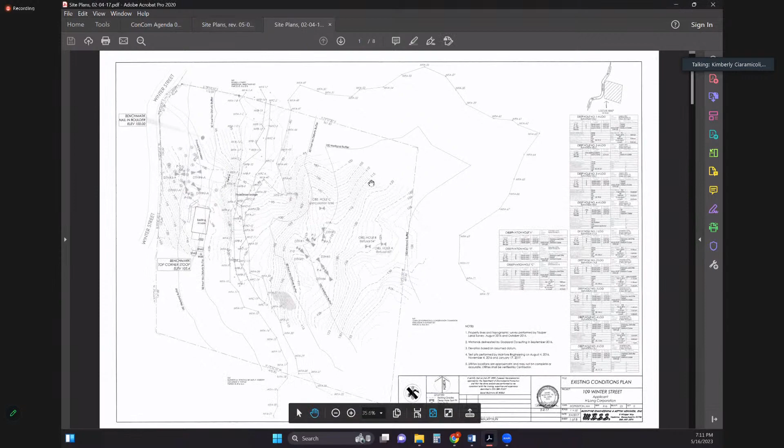Okay, here we go. So this was a project that the commission originally approved in 2017. There's an existing single-family home at 109 Winter Street. Here's the driveway. The permit is for construction of a driveway and a single-family home kind of in the back of the parcel. The driveway involves a crossing of a wetland and intermittent stream system. As I mentioned, the commission approved it in 2017, and I believe there's already been one extension for 3 years. Tonight, the applicant is requesting another 3-year extension of this permit.

I do note that recently the commission also permitted replacing the septic system for the existing home in the front of the property. Anna and I were able to take a look out there just to make sure the permitting associated with the septic system looked okay and the site was stabilized. And we did find that the site is largely stabilized following the septic system replacement, which is right in this location.

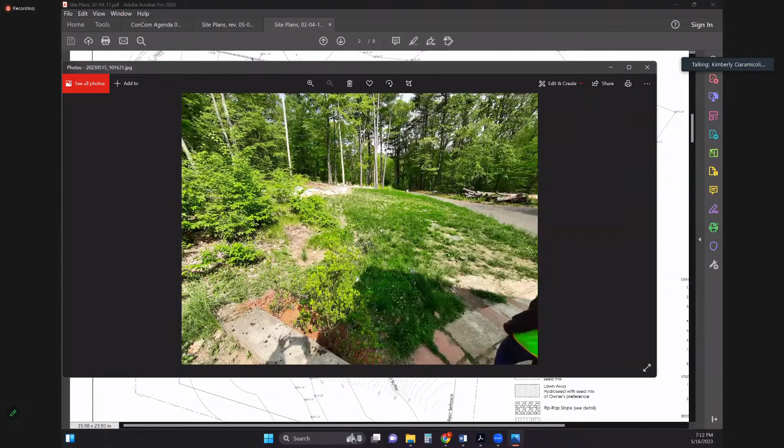Okay. So I guess the question here, Kim, is in your professional opinion, is the 3-year extension appropriate? Should we limit it to 2 years? What are your thoughts there?

Yeah, my thoughts are that 2017 was a ways ago. Generally speaking, wetland delineations are valid for about 3 years, so this is definitely surpassing that amount of time. It may be somewhat in the commission's interest to limit the extension so that if some things do change, they would have the chance to re-review this project.

So is a 2-year extension appropriate in this situation? I would say it's the purview of the commission. How confident do you feel? Do you feel like you would like a chance to re-review this, or do you feel comfortable extending it?

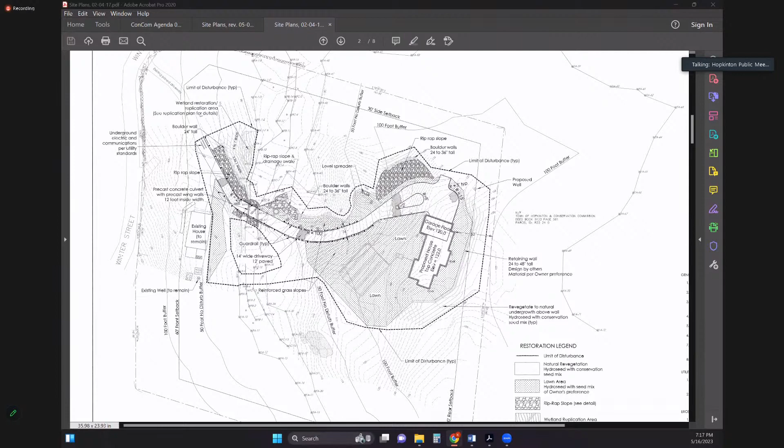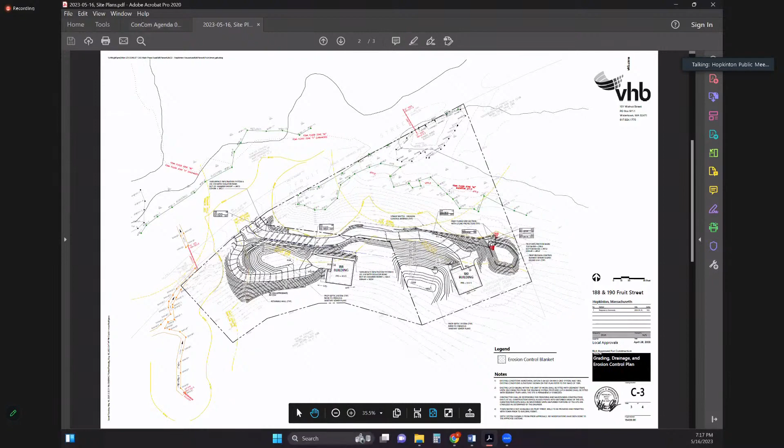All right, 7:17, so let's move on to the new hearings, Rebel Hill LLC. The Hopkinton Conservation Commission will hold a public hearing on Tuesday, May 16th, 2023 at 7 o'clock, virtually online, to hear all persons interested. Notice of intent filed by Rebel Hill LLC to construct 2 single-family houses with associated drainage and site work. The location is 188 Fruit Street, Assessors map R2, Block 21, Lot B, and 190 Fruit Street, Assessors map R2, Block 21, Lot A.

We have the applicant or a representative on the call. Hi, good evening everyone, my name is Richard Valarelli. I represent the owner or owners of these lots, and along with me tonight is Nick and Bridget from VHB to help walk us through some of the wetland and stormwater management aspects of the plan.

These lots were broken off from the golf course some time ago into their own single family lots, and the owners wish to develop these lots into single family homes. Over the past year, we've been busy reflagging and delineating wetlands to understand what's actually out there. Internally, we've been through several renditions, and this is the one we submitted with our notice of intent, which we feel is the least impactful way to develop these lots and stays completely out of a 50-foot buffer.

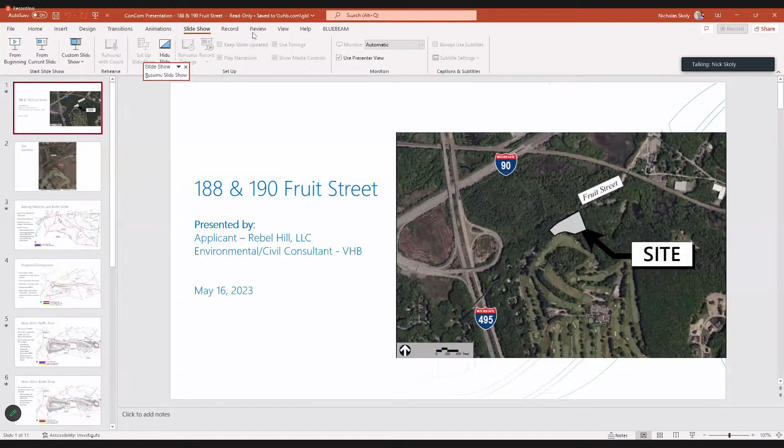As Rick mentioned, we were brought on recently to assist with the project. We understand this went through the ORAD process a couple of years ago, and there were some questions - I know a concept was shared. We've looked through a number of different options to try to ease some of the concerns the commission mentioned during that process. I'll kick it over to Bridget to talk about the wetlands themselves, then I'll pop back on to talk about the site and stormwater.

Thanks, Nick. I'm Bridget Hilgendorff, VHB, the environmental and civil consultant for this project for the applicant Rebel Hill. We're here to discuss the work at 188 and 190 Fruit Street. The project is located on these two adjacent parcels south of Fruit Street and north of that golf course and country club that was mentioned.

Looking at the wetlands, the site contains bordering vegetated wetlands on the northeast corner, in addition to a wetland located north of Fruit Street across the street. There's also an intermittent stream on the western side of the site, and in the northeast corner is bordering land subject to flooding. In terms of the buffer zone to these resource areas, it consists of undeveloped forest. You can see the 100-foot buffer zone to BVW and Bank in the bold dashed red line, and the 125-foot vernal pool buffer in the solid blue line.

There is a portion of the buffer zone that's previously disturbed, shown in the green bubble in the bottom corner of the site. This was previously used by the adjacent golf course for staging purposes, to stage construction debris.

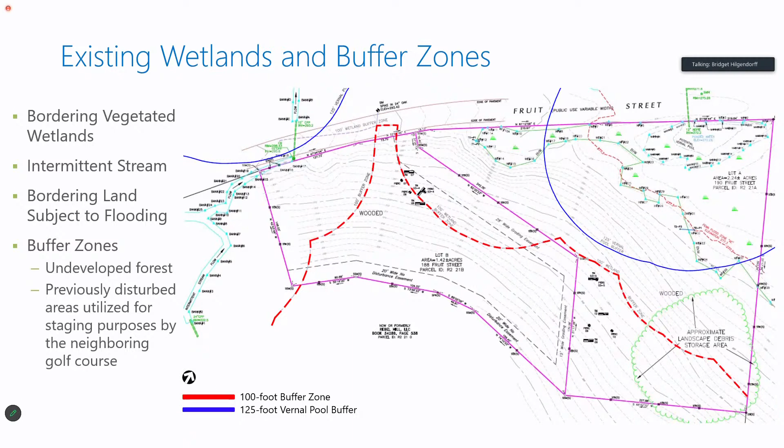Next slide, please. The development proposes to construct 2 single-family homes, one on each of these parcels, in addition to the 2 associated driveways, perimeter retaining walls, and stormwater BMPs. Work is only proposed within the buffer zone - no work is proposed within resource areas. Here you can also see the 50-foot no disturb zone highlighted in yellow.

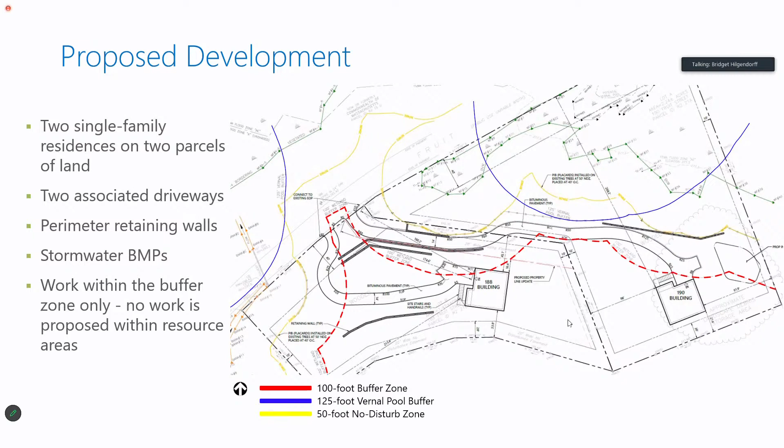Next slide. Looking at the work itself, there will be no impact to BVW, and no work is proposed within the 125-foot vernal pool buffer. Work within the 100-foot buffer zone includes the construction of the driveway and retaining walls, grading and landscaping activities, stormwater BMPs, and a small portion of the house at 188 Fruit Street.

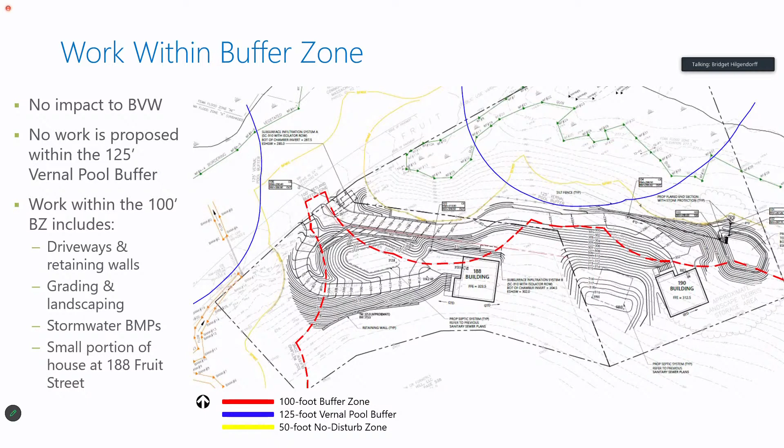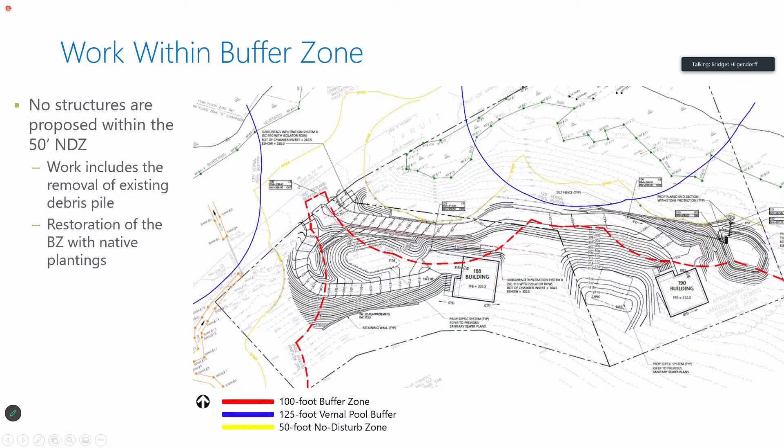Next slide. Looking at the 50-foot no disturb zone, the only work here includes removal of the existing debris pile and restoring this area of the buffer zone with native vegetation. If we go to the next slide, you can see the landscaping plan - this area of the buffer zone will be replanted with native shrubs and trees to provide viable habitat and allow this area to succeed back to a forested area.

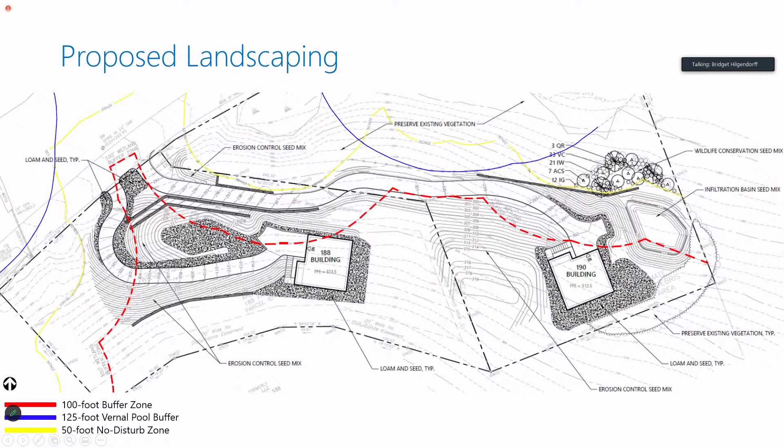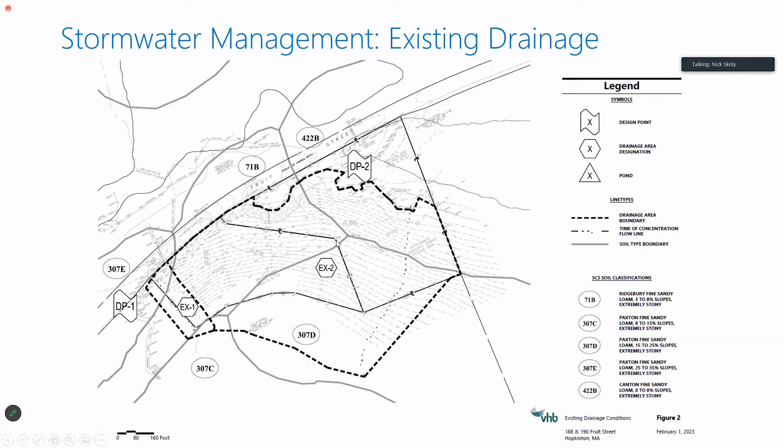Thanks, Bridget. As Bridget mentioned, the site is currently mostly undeveloped. From a stormwater standpoint, there are 2 design points: the wetland to the south and the wetland to the north. Design point 1, to the south, only a small portion of the site drains there, and that'll continue to remain undeveloped in the future. The big analysis we ran from a stormwater perspective was for design point 2, which is also that vernal pool.

As you can see, design point 1, which we discussed, stays exactly the same, and then design point 2 picks up the remaining drainage area. So 188 Fruit Street, which is the house on the left of this page.

The house itself will drain to a subsurface infiltration system to provide water quality and mitigate those peak rates. The 190 Fruit Street lot driveway will also drain to a subsurface infiltration system. And the house and a portion of the driveway will drain, on the right-hand side of this screen, to a surface basin, which will also provide infiltration for water quality and mitigation of peak rates.

So in looking at this design point, we do actually decrease peak rates for the 2, 10, 25, and the 100-year storm.

I've been working with Kim, going back and forth on this — we're exempt from the state stormwater standards, but we are required to meet the local stormwater standards. Since there was some confusion early on, we are meeting both: all the state standards as well as the local standards.

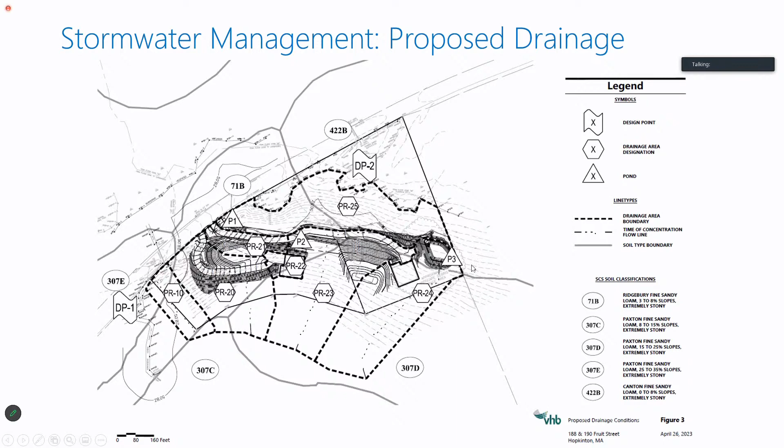This is a more zoomed-in version, which shows in dashed lines the subsurface systems — one is at the end of the driveway and just adjacent to the 188 building — and then the surface basin as well. The surface basin is being located primarily in the area where the landscape debris was, so that portion will be cleaned up.

The previous consultant did do a number of test pits out here, one for the septic systems as well as for these infiltration areas. I believe they were in front of you requesting permission to do that, when they showed that concept about a year or so ago.

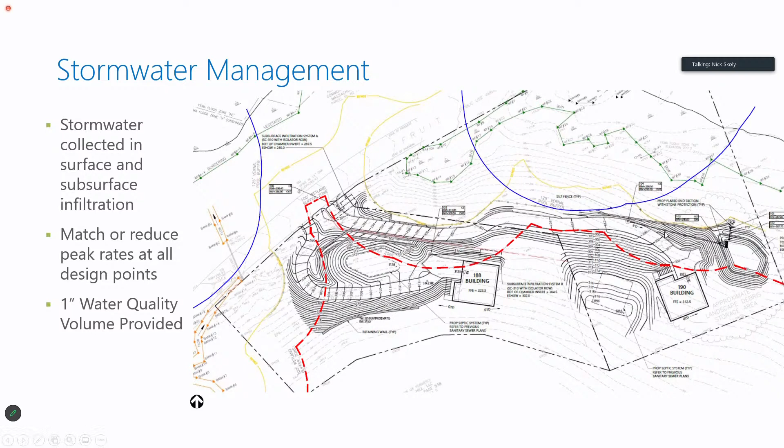We did get a few comments from Lucas. I can actually share an updated version of the plans — we got them the other day and have been working through them. Sorry for the late submission, but we just submitted a response to those comments. There were a number of comments, but I just want to walk through the few I think are important.

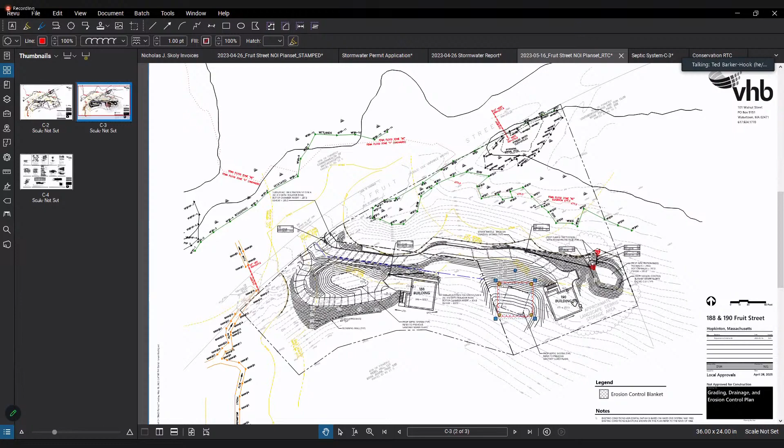If I may continue—if I'm reading the plans correctly, next to the 190 building, there's a tremendous amount of reshaping of the earth. I'm looking at the contour lines in light gray and then redone contour lines in black. Is that true? Is that what I see? I'm looking at the other side of the house, Kim, or whoever's working—yeah, this one.

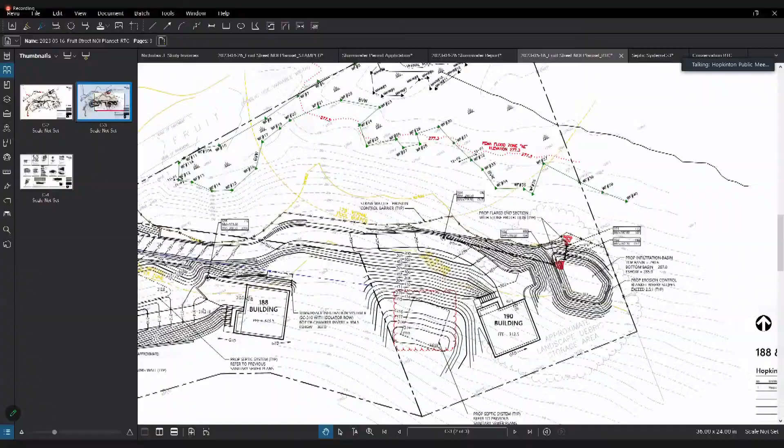Nick, I think you've heard from the commission. I think there's a little bit more work that needs to be done on this. Bridget, thank you for your presentation. And we'll continue this out to the next hearing, which is June 6th.

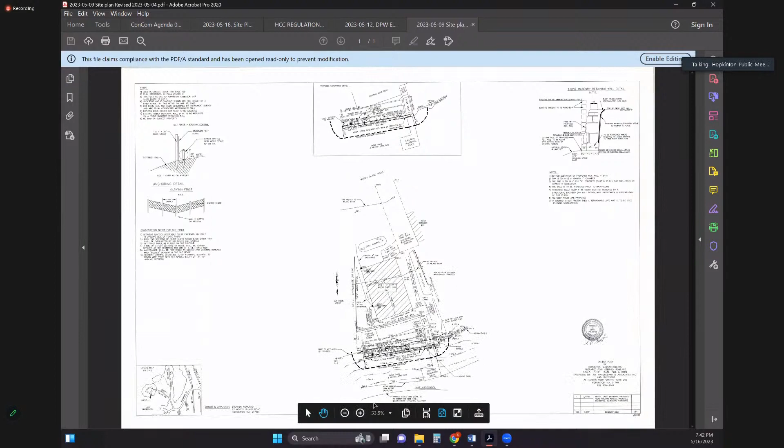Okay, thank you, thank folks. Thank you, appreciate the comments. Look forward to sort of working this through with you guys. Thank you. Thank you.

Okay, moving on to continued hearings. Roland, 27 Woody Island Road, notice of intent to replace the retaining wall.

Do we have the applicant on the call? Hey, this is Dave Oppenheim. Mr. Lockhart, good evening. I have Steve Rowland here with me as well, owner and applicant. So we were back in front of the board on March 14th.

We've made some adjustments on the notice of intent for the information that was lacking. I believe we're all set with the notice. We updated the plan with some additional site features. We indicated the existing driveway to the north from Woody Island Road that's going to serve as our access point. We've indicated some plantings, some spot elevations, some contours, some walkways, some planters, some grass.

One of the comments some of the board members had was to indicate the downspouts. If we could disconnect the downspouts and put flexible tubing and piping, and move it and change the direction from heading to the lake to the front yard, which we've done. There was a retaining wall behind the house underneath the deck that's been added as an existing site condition.

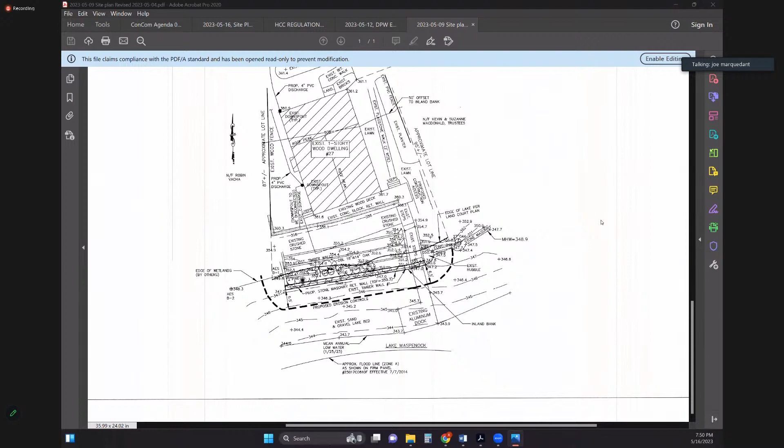Appears to be a 3/4 inch crushed stone, so to use a typical jute with an opening, some of that stone's probably going to go right through. A lot of that material is stone, there really isn't much earthwork. So we're going to use a coconut fiber and 70% straw, kind of like a blanket that's biodegradable with no weeds. We're going to lay that in, and it will just disintegrate over time. Got it, okay. Yeah, you can see the grade, that stone that's there. Thank you. Yeah.

Okay, questions? Yep, sorry, go ahead, Joe. Dave, so we will provide for the variance, we'll do that. And yes, like I said, we are going to file with Chapter 91.

Okay, great. Thank you. Questions or comments from commission members? To the chair, Kim. I would just recommend a special condition on any order that we issue to have our order be null and void should the applicant not obtain the Chapter 91 license as required.

Okay, or maybe we already have a special condition that says all the other approvals need to be in hand. Maybe we're already covered, because the Chapter 91 needs to be in hand, right, as a condition of our permit, or sorry, our order, right Kim? Just thinking out loud. Okay. Sorry, Jim, did you have a comment?

No, why is my hand raised? No, okay, I thought... all right.

Any other comments, questions from commission members? Questions or comments from the audience? Okay, Kim, are we comfortable voting on this tonight?

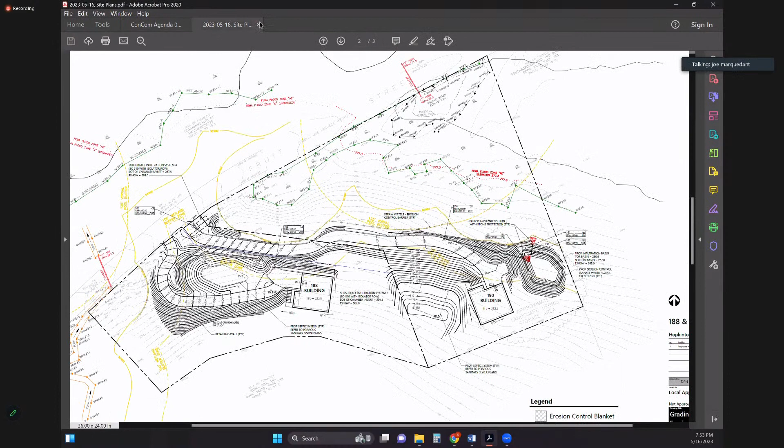Okay, great. Thank you, Dave. Thank you very much. Have a good evening. You too. Bye-bye.

Okay, moving along, RDA for McEachern, 55 North Mill Street. This is a request for determination of applicability for an in-ground pool.

Good evening. Good evening. My name's Norman Hill from Land Planning. My address is 52 Millbury Street in Grafton, representing the McEacherns this evening.

We discussed this at the last meeting, and there were some changes you asked me to make to this plan. One change was to add a leach pit for backwashing or draining the pool. We've added that. You also asked us to add siltation controls around the temporary stockpile area, and we've noted that those need to be put in place. Then you asked for a 10-foot wide swath of land to be allowed to grow back in naturally. That's the gray area on the plan, currently lawn. My clients have agreed to stop mowing that area and to put signs every 30 feet to mark the protected zone, so it can grow back in.

I'd like to also point out that this is a proposal for a new swimming pool, which will be built in an area that's currently all lawn, so we're not proposing to take down any trees. I'll be happy to answer any questions you may have.

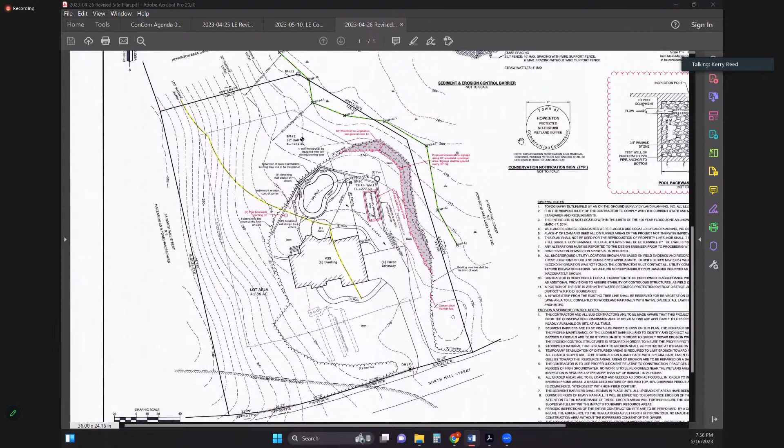Thank you all very much. Everyone stay well, thank you. Thank you, Mr. Hill.

All right, moving along, Hopkinton Parks and Rec, 4 Lakeshore Drive. This is a notice of intent for a seasonal dock. I think, Kim, all we were waiting on with this application was the DEP file number, correct? You are correct.

All right, are there any questions or comments from commission members? To the chair, we still don't have the DEP file number. I think we need to continue this. All right, thanks Kim, so we'll continue that out. Were there any questions or comments from the audience while we're on this application? Okay.

Singh, 42 Greenwood Road. This is a continuation of a notice of intent for the tennis court. Kim, you want to give us an update? Sure, just give me a second to pull this up.

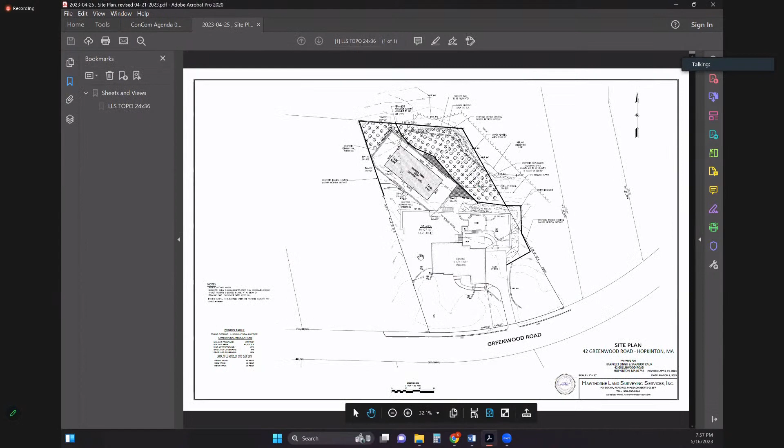So this is an application, like you said Jeff, for the construction of a tennis court in the rear of a single-family home. At the last meeting, the applicant provided updated plans the day of the meeting, and the commission requested that Lucas Environmental be allowed some time to review the updated plans and provide a comment, which Lucas Environmental has done. The applicant has actually already responded to the comment as well. So I wonder if it would be most efficient to have Joe run through his comments briefly and then have the applicant respond to get us up to the current progress.

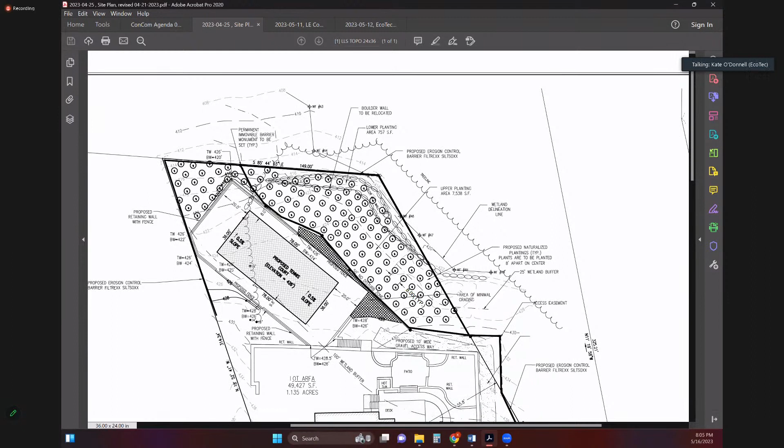So, Kate, is the location of the toe drain actually depicted on the plan? It's not currently. So it's in the northwest part of the wall? Yeah, northwest part of the wall. Okay, that's the low point if you look at the current grade. Yep, so in that kind of triangular area there, it would be. Okay.

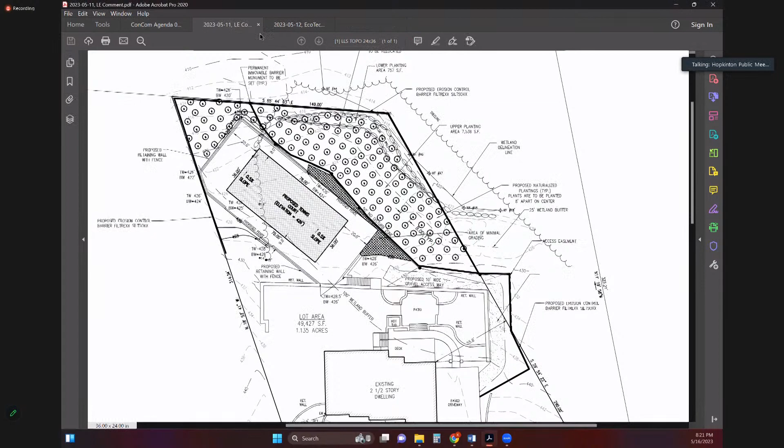All right, Kate, thank you. Thank you, have a good evening. Thank you, Mrs. Singh, and good luck with the tennis, young lady. Thank you, I wish you well. Thank you very much. Thank you. Okay.

Hughes, 47 Stony Brook Road, request for a 1-year extension permit.

Kim, you want to give us a little bit of background on this, please? Sure, let me see if I can find a good plan for us to look at.

So 47 Stony Brook Road. There's generally a wetland complex here, I believe to the south. It was originally permitted as 2 single-family homes with a common drive. Since the time of permitting, the application has changed to 1 single-family home with a single driveway on the same lot, so this is the same parcel kind of turned. The wetland complex is over here.

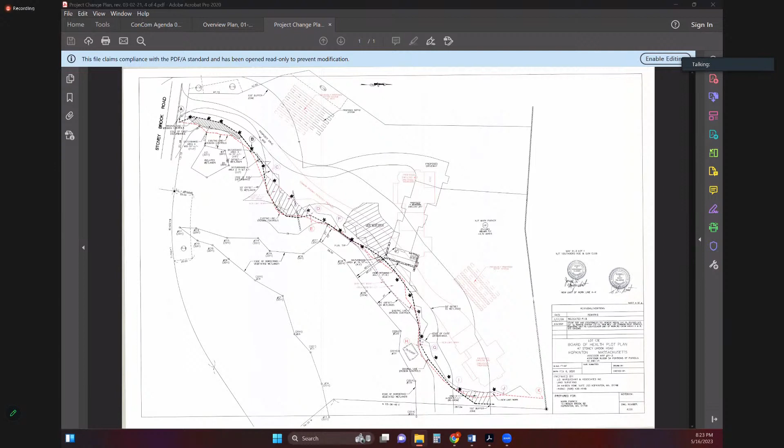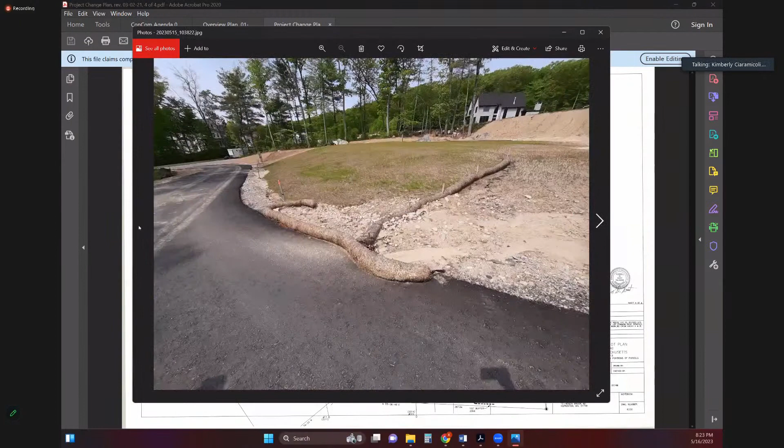All right, so the house is constructed, the driveway's in, the septic is in. For all intents and purposes, this application is almost all the way there. Here's the house, here's the septic with a little bit of vegetation.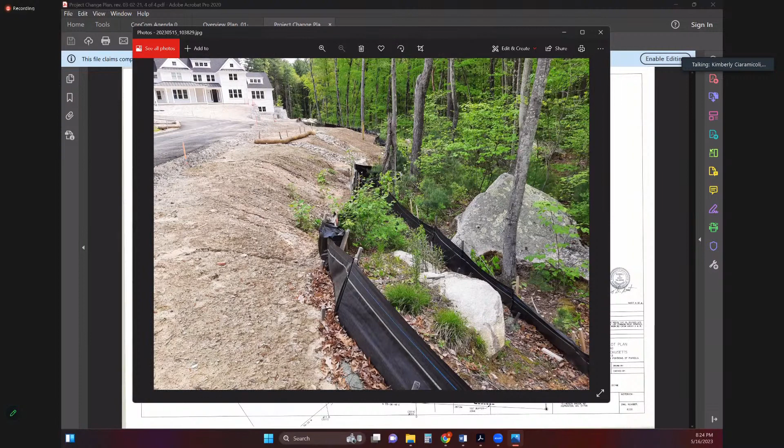When I went out, I did notice that a lot of the area is unvegetated, with kind of loose soils, and there was evidence of real erosion occurring in various spots. You can see here, there's erosion controls, and somebody dumped some riprap to try to control it down towards the slope. It does look like there's efforts to install erosion controls and good practices for erosion and sedimentation. So the contractor has been doing a good job, but the condition out there is just a lot of unsecured dirt.

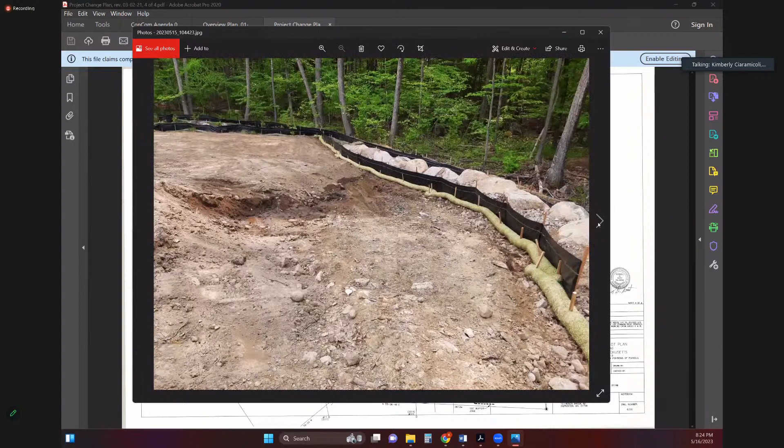So I did reach out to the homeowner about my concerns. She provided an update that their landscapers intended to spread loam and do final seeding in late June. I reached out to her and let her know that timetable should be moved up into May, not only for erosion and sedimentation control, but also because the seeding will take much better in May versus late June. You can see there some of the old erosion controls getting overwhelmed.

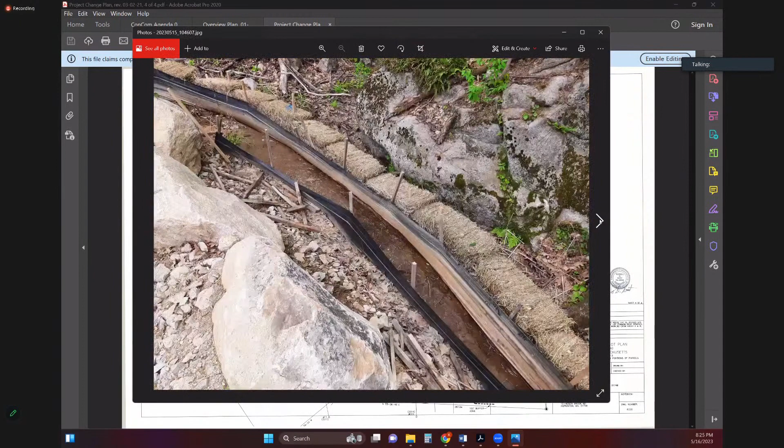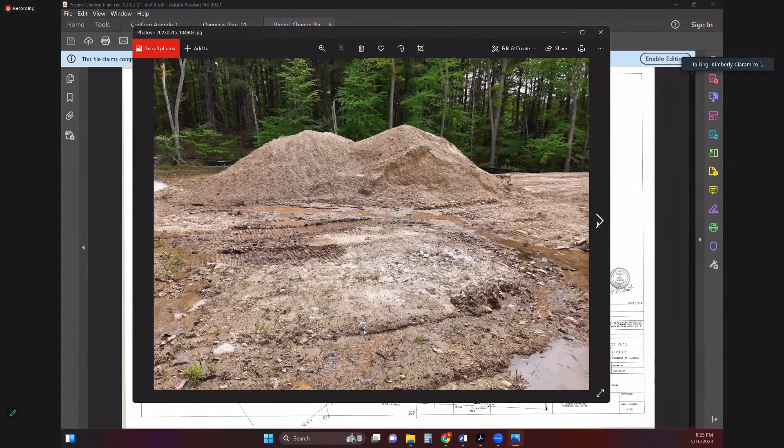And there are two areas on the site, which was interesting, where groundwater breaks out of the slope, one there and one there. The groundwater is currently flowing over an area that's unsecured and carrying sediment, so that will need to be dealt with. There's a stockpile here. The homeowner is receptive to moving the plan up for final stabilization, and I believe the site contractor is going to help the landscaper out to get some site stabilization going as soon as possible. Jamie, the homeowner, has been waiting patiently on the line.

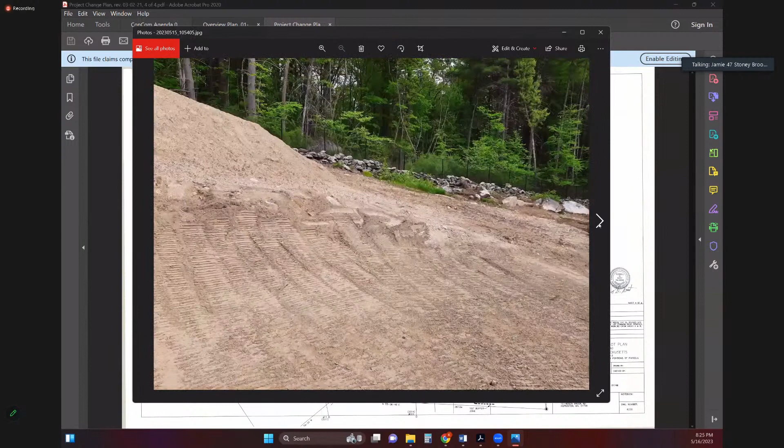Jamie, do you want to jump in and add anything here? Yes, our goal is to try to get this done as soon as possible. We're close to the end of May, so end of May, early June, because we agree with you, Kim — if we do it late June, there's a possibility it may not take. And the last thing we want to do after this extremely challenging project is waste any money. So that is our goal.

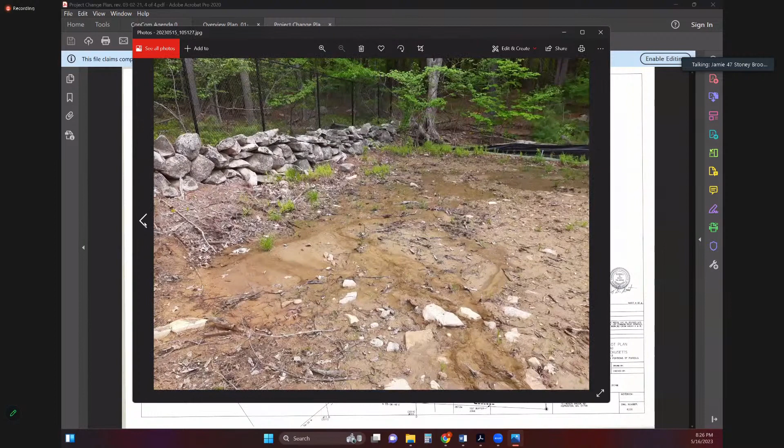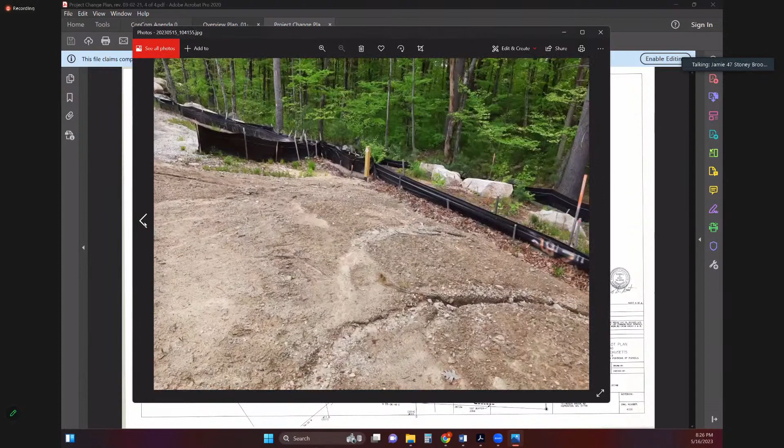And we have the excavator out there now prepping it so we can get the loam in ASAP. So our goal is to do everything you ask as quickly as possible. It's just been such a challenging project for us and really overwhelming, so everything has been pushed back and been a little difficult. That's where we are right now. But we are absolutely trying, and we have an amazing builder who has been keeping up with the erosion control, and he has people out there all the time. He would come out every rainstorm to make sure nothing was breached or anything like that. So we're doing our absolute best. I can assure you that.

So Jamie, are you the homeowner? Yes, my husband and I. Okay, and who's the contractor, if you don't mind me asking? Brenshaw Corp, it's Dave Wilkinson from Brenshaw Corp.

Yeah, okay, no, we appreciate you. I know it's frustrating, it's been a challenging project for you guys. We appreciate the efforts on the erosion controls you guys have done, and the contractor has done a great job making sure the site is stabilized and nothing's getting into the resource areas. Having said that, we just need to get this kind of buttoned up, as you say. So I think the 1-year extension request is appropriate, Kim.

Yeah, I would agree. If you're amenable, I'd like to carry this on the agenda for one more time and see where we're at at our June meeting. As we said, the contractor appears to be doing a good job with the erosion controls, but given the volume of unsecured soils, if we did have a really big storm, it makes me a little nervous.

So I just want to keep this in our view to make sure it gets prioritized, Jamie. Does that make sense to you, if we can just continue this? I'm sorry, I haven't been on a call like this before. Does that just mean you wait for an update and then wait to extend it?

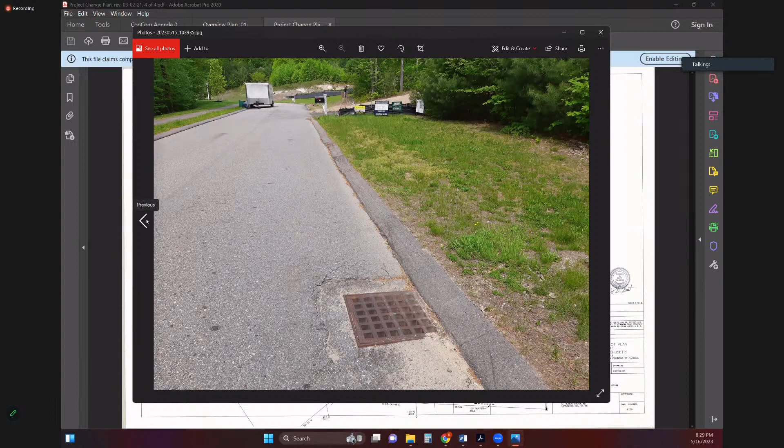Okay, thank you, sorry to slow things down, Jeff. Yeah, no problem, thank you, Ted. Okay, so Jamie, we'll just continue this to the next meeting, and if the contractor goes forward with the stabilization, we should be good to go. Okay, great, thank you. Through the chair, okay, thank you.

Yep, Kim, sorry, just one more thing for Jamie's benefit. Hydro seed with tackifier would be my recommendation. It'll get it nice and sticky with a good layer of seed on there, and it should hold the loam down and get you a good base for growth. Okay, well, thank you for that.

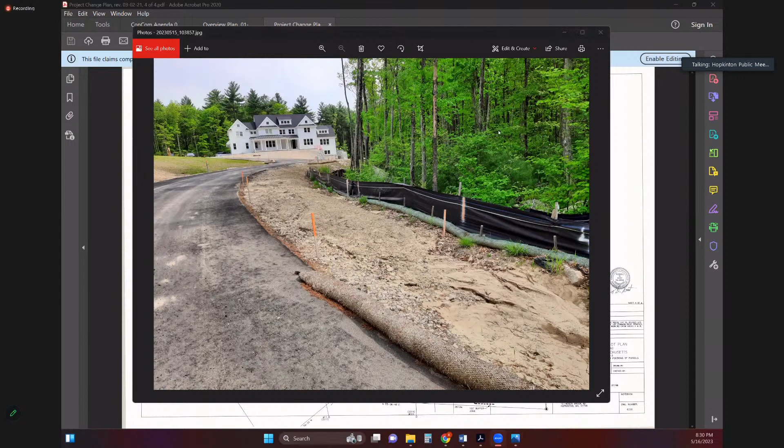Thank you, Jamie, thank you so much. Welcome to town. Yep, thank you. Bye. All right, so Kim, what was that you recommended?

Just a hydro seed with a tackifier, it's like a bonding agent. Oh, a tackifier, okay. Okay, good to know.

All right, Wall Street development violation discussion.

Kim, I don't think Mr. Petrosi is on the call. Do you want to give us an update? I know Ted went out to the site a couple weeks ago and the erosion controls were less than. Yes, so Ted went out on April 23rd and again on April 30th. His photos on April 30th alarmed me.

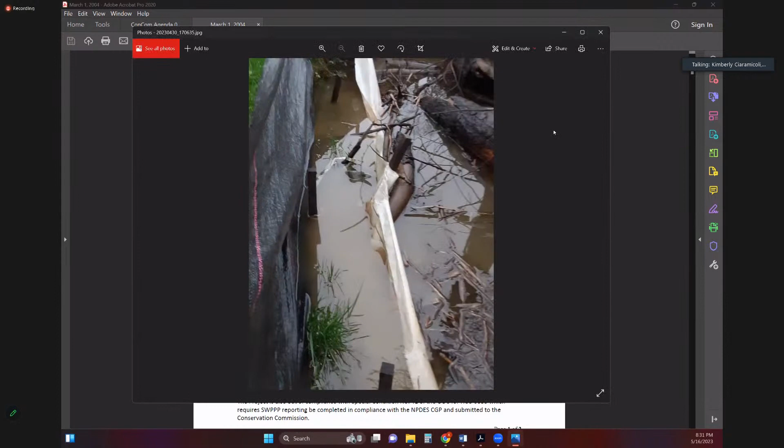Thank you for going out, Ted, by the way. Yeah, excuse me, sorry, Kim. It's what I do, Jeff.

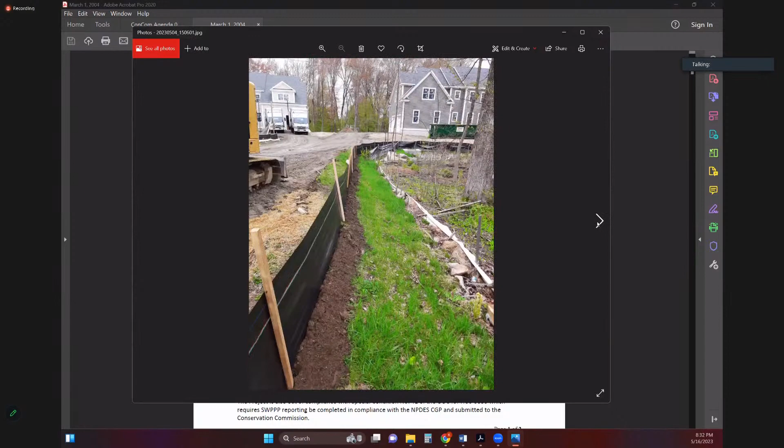The contractor added topsoil to some of the lots, so you can see he's made substantial compliance on the construction of the actual homes. And see how there's kind of a topsoil layer, that's what kind of eroded. This layer of erosion controls here was new as of my site visit.

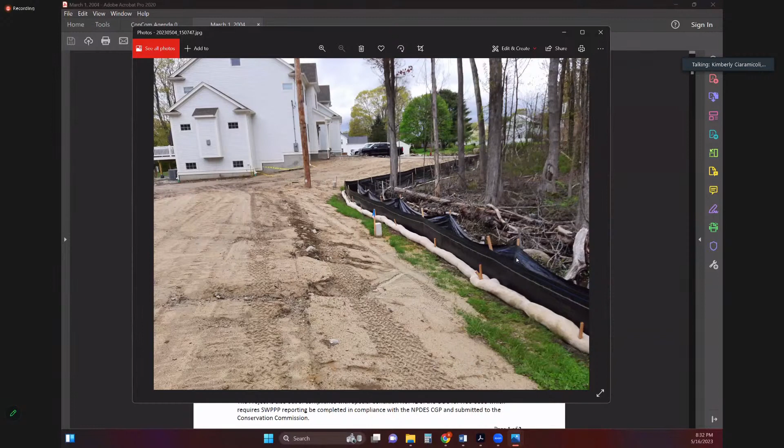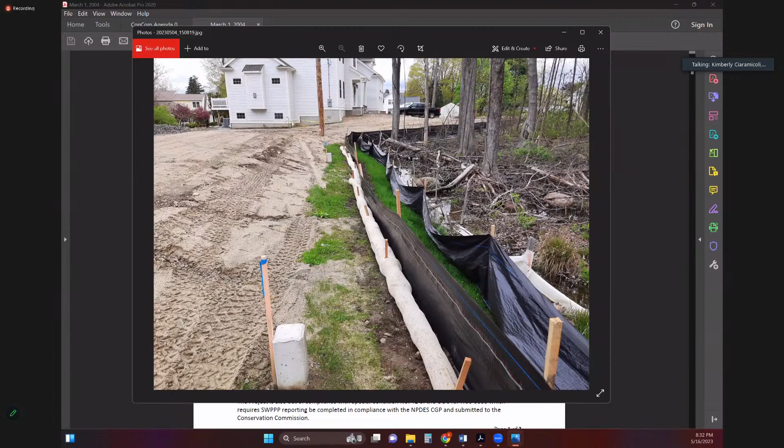This was not installed on April 30th at the time of the violation. The middle erosion control layers, I believe, were there - Ted, correct me if I'm wrong - however, they were not toed into the slope, so they were basically flapping in the wind, and they're heavily deteriorated, sitting there untended for over a year. And then you can see the original limit of work and erosion controls here, so those are in a complete state of disrepair.

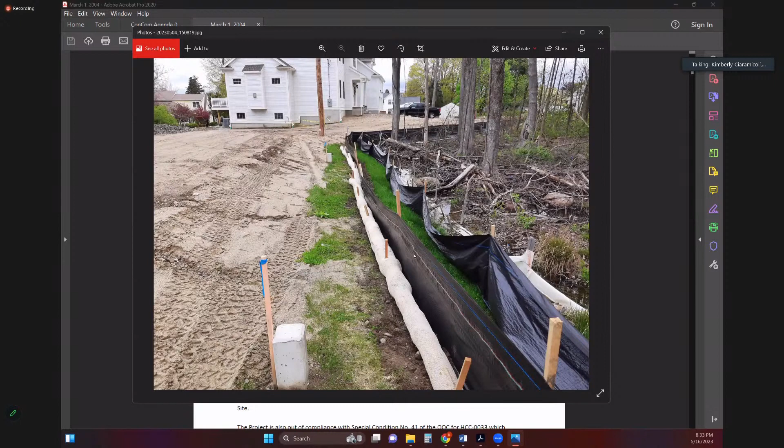So I did issue a notice of violation on May 1st for the observations that Ted made on the 30th. I provided this to Mr. Petrosi and let him know that we were going to have this conversation, but he declined to attend. As I had stated, by the time I went out there, I believe it was the 3rd or 4th of May, he did install an additional line of erosion controls, a silt sock with a silt fence that is toed. It's toed about 6 inches, not a foot like I like to see, but we do have some installation effort there. These erosion controls were installed in response to my notice of violation.

So, Jeff, I would guess, kind of what my question is, what would the commission like to do for next steps?

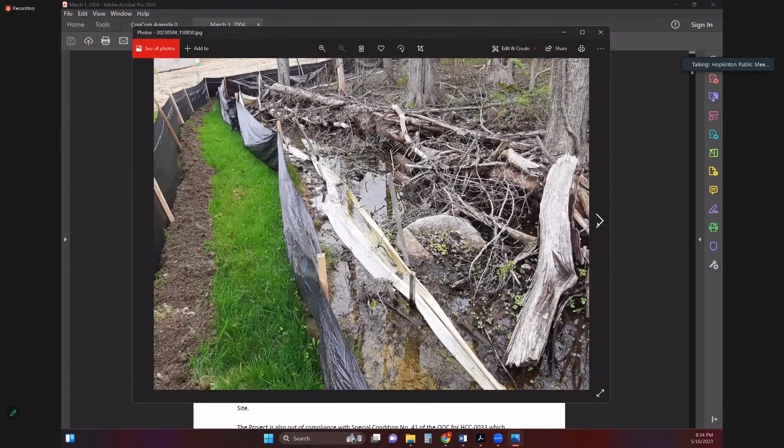So you sent the violation letter to him, right? To Mr. Petrosi? Correct. I would think, and I'll open it up to the other commission members, that we have Mr. Petrosi attend our next meeting to discuss the current situation.

So Kim, the one detention basin where they have, I'm trying to recall what they called it, but they had the PVC pipes that kind of, were those capped as they're supposed to be? Do you know? I did check those. They were capped.

Here's the basin on the day of our inspection. Yeah, what did they call that again? The level spreader. Thank you, that was what I was trying to recall, the level spreader. Okay, so that's capped, so good.

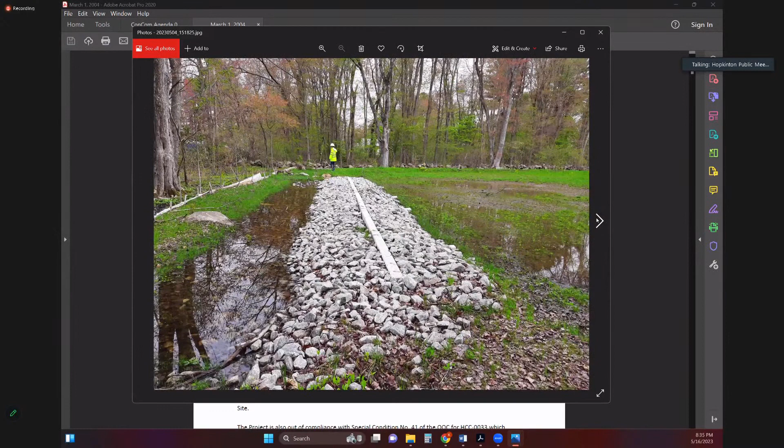Okay, yeah, so I think, I don't know. What do you guys think? Just have Mr. Petrosi come to the next meeting?

Jeff, through the chair. Yep, go ahead, Ted. Just one other update, I did not have my phone, I didn't take pictures. What I saw on Sunday when I last walked the property looks very much like Kim's photos. There is, I would call, a fairly significant sediment breakthrough along the driveway to the easternmost house. So the sediment that got underneath has not been removed from the wetland. I don't know, Kim, if you asked for that to happen, or if the fear is that would cause more damage, but it looks like just a pair of hands could scoop the sand back out and remove it.

It looked to me like they put up socks but ignored what went underneath. I don't know if that's a concern to the commission, Kim, or not. Yeah, I think so. The protocol is to remove it and take it out. I can request that be done. As of Sunday, that was not done. Maybe it happened yesterday. Honestly, he should probably remove the non-functional erosion controls at this point too.

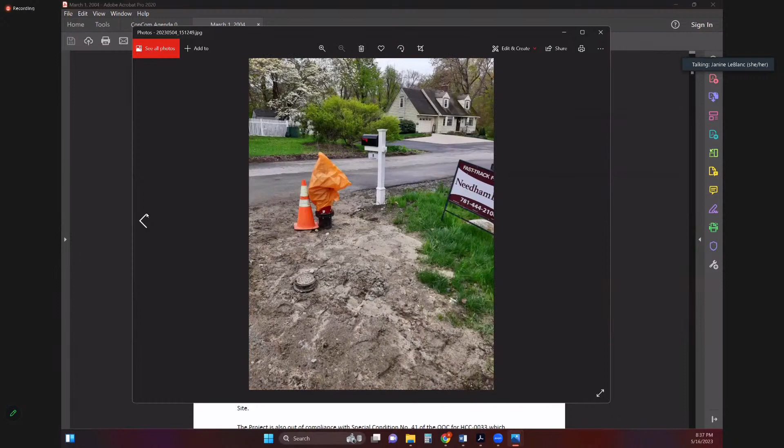Although they are serving as kind of a demarcation of our original limit of work. So from looking at Kim's photos, there is that area that, okay, yep, there's the erosion control barriers, and there's some improvement, but some of the other pictures, it still looks like there's issues. So what Ted found hasn't completely been fixed.

A lot of it's still in disrepair today, right? It's just that additional erosion controls keep getting added in front of the older erosion controls. Obviously our limit of work hasn't changed, but additional erosion controls keep getting added up gradient of the original as work is completed. Do we think the issues from Ted's pictures, which I agree were a mess, have those been fixed at this point, or are they still in violation?

I would say because of the new erosion controls installed, the potential for additional sediment migration to the wetlands is now somewhat minimal. But the sediment that's already there in between that area could definitely still migrate to the wetlands, like you're seeing in this photo, all this sediment. Actually, the displaced sediment from the Ditch Witch when they installed the silt fence could also run down into the wetland as well.

So yeah, maybe I'm just gonna kind of throw this out there. Maybe we make the request to Mr. Petrosi that the sediment that has been displaced beyond the erosion controls be removed by hand.

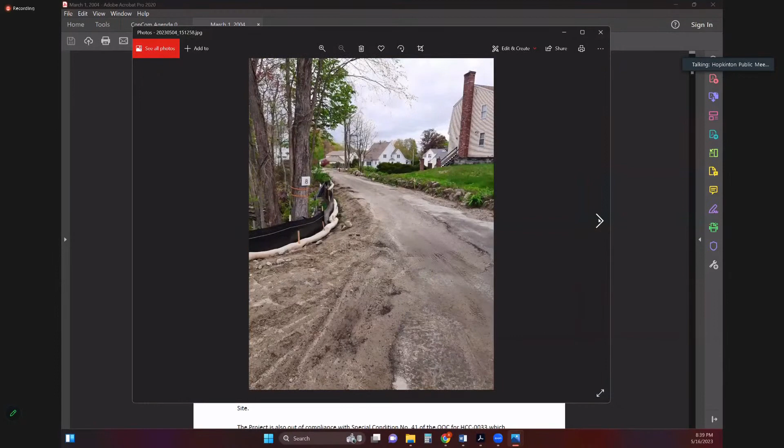As a request, we have him come before the commission next meeting to give us an update on what the status is. Does that make sense to everyone? Yes, to me it does.

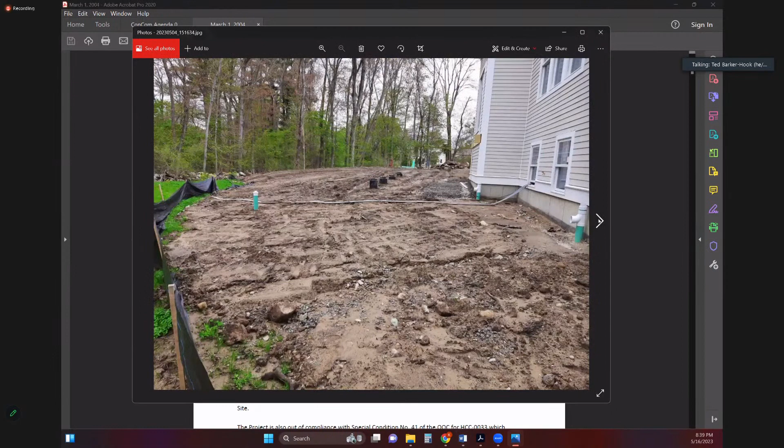Jeff, are we asking for status just around that wetland right off of Leonard, but also back of the property by Mr. Terry's property? While I don't see sediment flowing into Mr. Terry's property, the erosion controls haven't been fixed in years, and there's lots of water running around dead silt socks. One of the photos I took, I tried to take a short video so you could see how much water is running unrestrained into Mr. Terry's property.

Yeah, I think a complete update, Ted, is my sense. Okay. Yeah, here we go, Kim.

Yikes. So there was the discussion, and I'm not sure all the commission members are up to speed. There's this video with the Pleasant Street and Maple Street kind of groundwater seep there. I know that you had talked to Mr. Westerling and I think Mr. Manser about that.

Was that ever determined, whether the source of that was found? The short answer is I do not have an answer for that at the time. However, let me see if I can ground myself. I do not believe that these two things are connected. Okay.

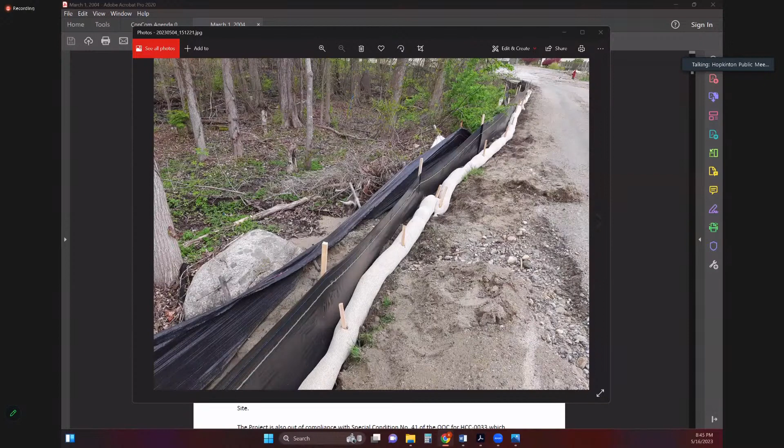Okay. So anyways, just wanted to bring the commission up to speed on that, because that was something residents had reached out to us on. And then, public forum requests - Kim, do you just want to give everyone an update on the forest cutting permits situation, so everyone's up to speed on that.

Do we want to talk about Kimball or Teresa? Let's talk about Kimball first. So Ed may be more up to speed on Kimball than I am, but the information I received as of last Friday was that the landowner had asked their tree contractor to stop cutting, and that they were amenable to discussions with abutters and possibly the town about the future of the land.

I'm not sure everyone's up to speed on what happened, but off of Kimball Road, which is off of Chestnut Street, tree contractors came in and started clear cutting a privately owned lot. I think it was 40 or 60 acres, Kim. I don't remember the exact acreage.

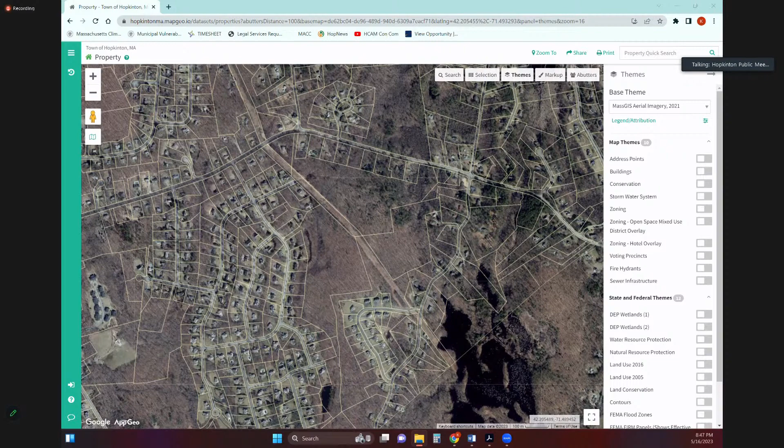And there's a couple of these that have been filed in town. And it's unfortunate because these logging or tree clearing companies come in, and there's no recourse for Kim to say, hey, these are vernal pools, buffer zones, these are the wetlands. They're allowed to just come in and basically cut right up until the wetland boundary.

So, as you probably read in the paper, the neighbors for Kimball Road had spoken to the property owner, and the property owner agreed to stop the cutting until an agreement can be potentially made for the town or some other party buying the land. Maybe Ed, you can jump in here and give us an update on what's going on.

Sam Sater and Bob Levinson came to open space and explained all of this, and that the owner was allegedly amenable to selling it, but no price has yet been mentioned. I have brought it to the attention of the town manager and have had no response. And I think that's about the limit of what I know. The open space voted to look into acquiring the property.

What the value of the property is, I have no idea. Whether it's within our resources, I have no idea. There's a lot of balls that are still up in the air, I guess, for lack of a better word. Open space said, let's get some people together, hopefully with Norman, and chew the fat on this. So far, nothing along those lines has yet happened.

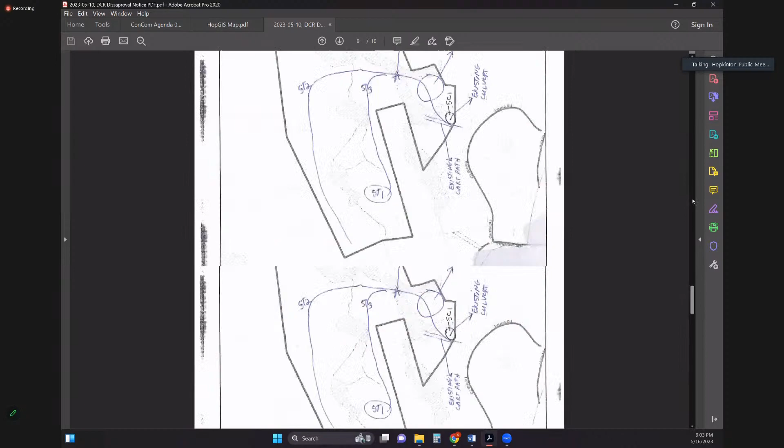And hopefully they're not going to appeal it, but we'll see. I'm glad we had a successful - I feel like I have a good line of communication with our DCR forester now. Something good to come out of all this stuff.

Okay. Were there any other public forum requests, Kim? None. Okay.

Any updates from other committees? Nothing from Upper Charles or CPC.

Okay, if I can get a motion to - well, everybody knows what Upper Charles is going through, right, the committee. Yeah, it's unfortunate, but we'll see what happens.

Okay, a motion to adjourn the meeting for this - well, actually Jeff, I will say something. So the select board took up public comment on the Upper Charles Trail Committee and the petitions at town meeting that were passed, and the selectmen - I left believing that they were going to have some further discussion on the Upper Charles Trail Committee's charge, and whether it should be reorganized or dissolved or whatever, but there will be opportunity for more conversation before the select board decides to take any action.